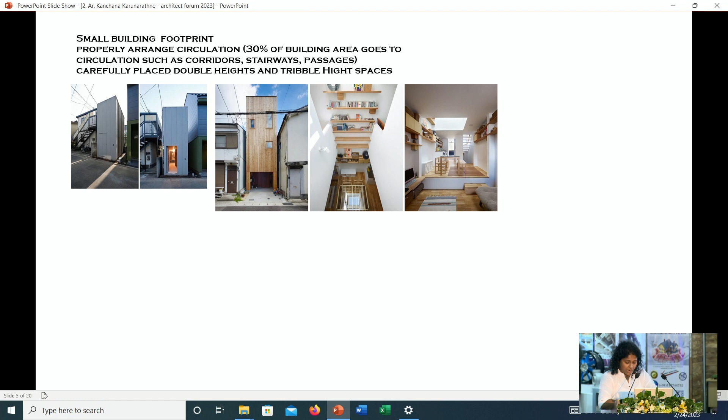These are some images from Japan, which is a highly populated, highly dense area. This is like one perch, less than one perch, and this is how they are building. What they essentially do is gather what is most important when designing - what are the most essential aspects of a house.

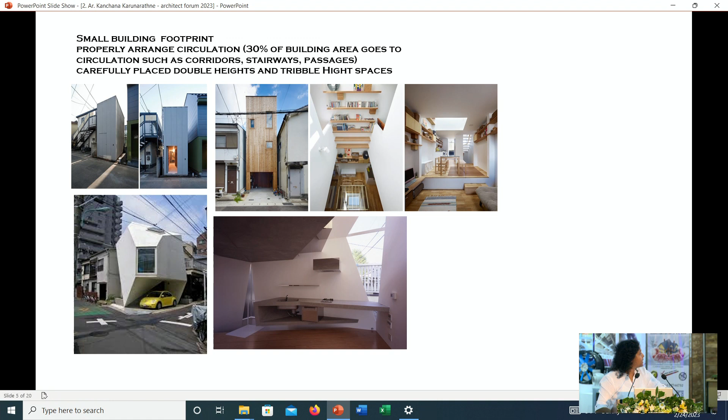This is what one solution looks like. These are some other small projects which I got from Japan. This one is two perches, the house is entirely built on two perches. So what is the total area of one perch? It is 272.25 square feet, which is not a small amount if we utilize that area properly.

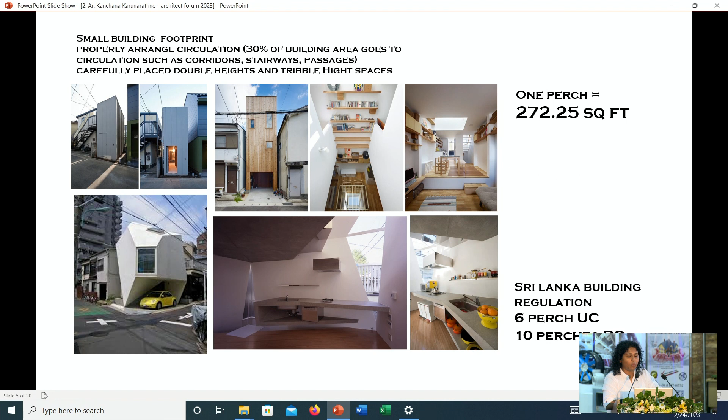But Sri Lanka - now Japan is a developed country, they have about 60% forest covering the country. But in Sri Lanka, the urban council and provincial council have a strict rule: the minimum plot coverage should be more than 6 perches if it is an urban council, and more than 10 perches if it is a provincial council.

These are the regulations when we go to build houses in Sri Lanka, so we can't go beyond this extent. We are restricted by regulation even within this crisis situation. The regulations have not adapted to the current situation in Sri Lanka.

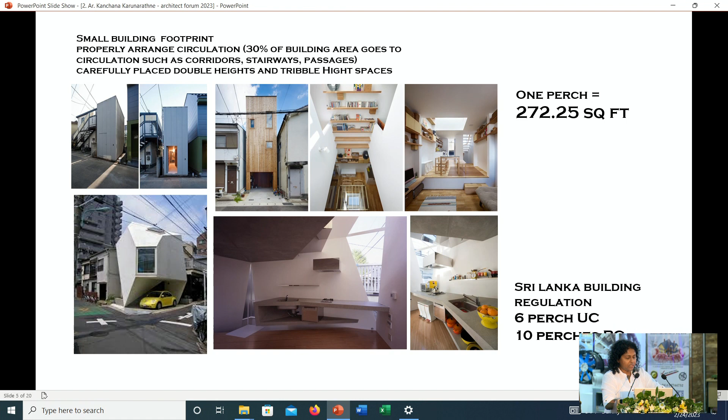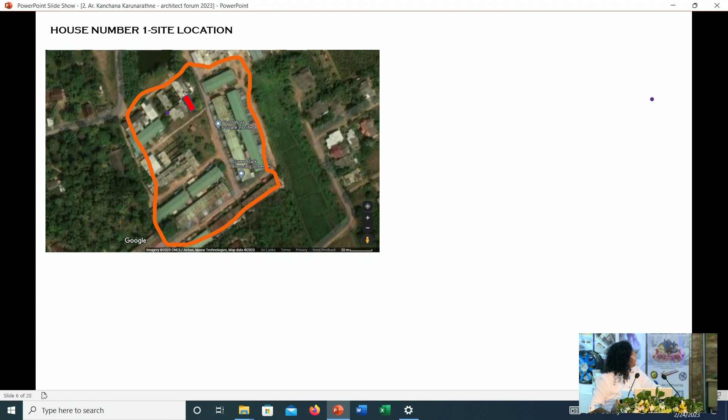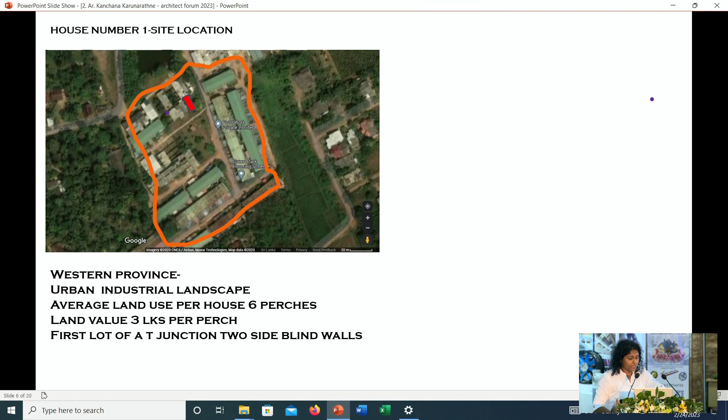My client bought one plot here, but the regulation requires 6 perches to build a house. Now each perch became about 3 lakhs, about 1.8 million rupees. This was the situation when we got into the site.

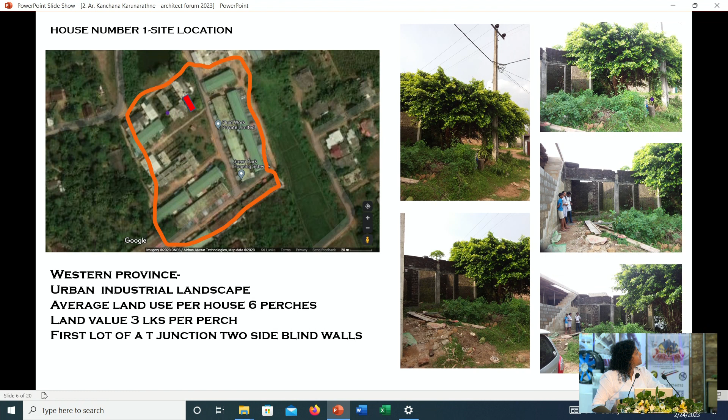These are images of the site. When we took the site survey and did the plans, even though it says 6 perches, the actual area was 5.8 perches - some peripheries had taken part of the land plot as well.

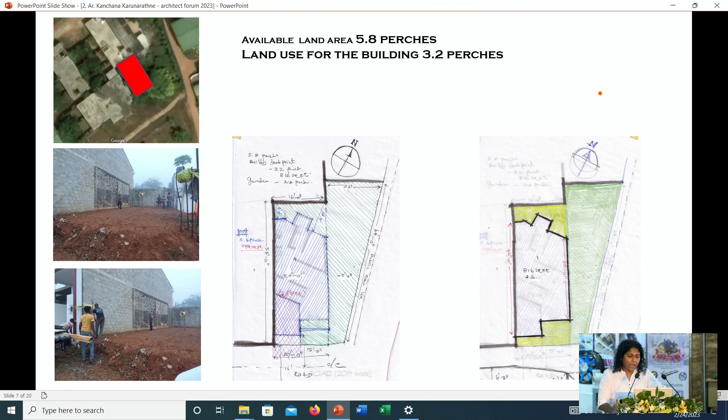From that, we can't use nearly 2 perches because of the rain. There is a purple line marking a stormwater line, and even for a small rain, that entire orange-colored area gets flooded.

So what we did was avoid that flooding area and limit the building to one side of the site, which was about 3.2 perches. So this entire building was built on 3.2 perches of land.

So we have a front width of about 6 meters, and total length of 16 meters.

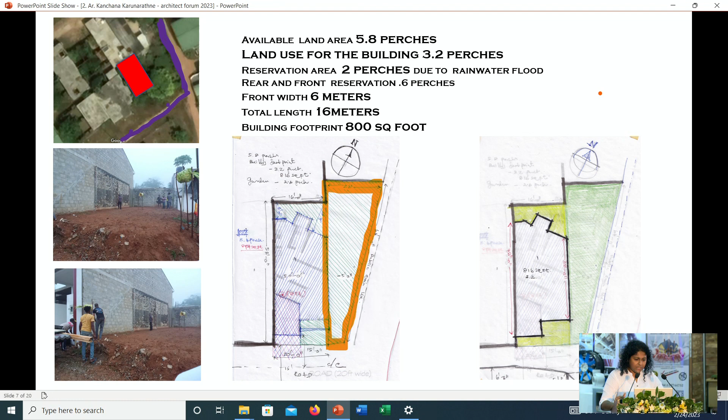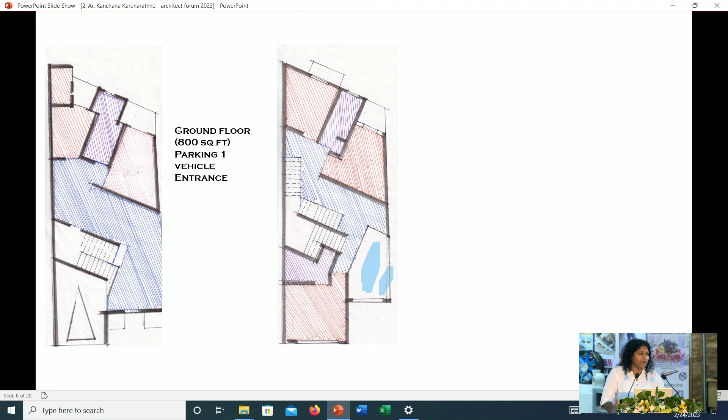Clients have their main requirements. They said we need at least one parking. Okay, fine. Then they need a grand entrance. Okay, I don't know about the grand, but entrance is fine.

Then double height living. So we have 3.2 perches, and they need double height. Then they want to do a small budget house. I said okay, we will do a double height. Everybody's familiar with double height volumes, right?

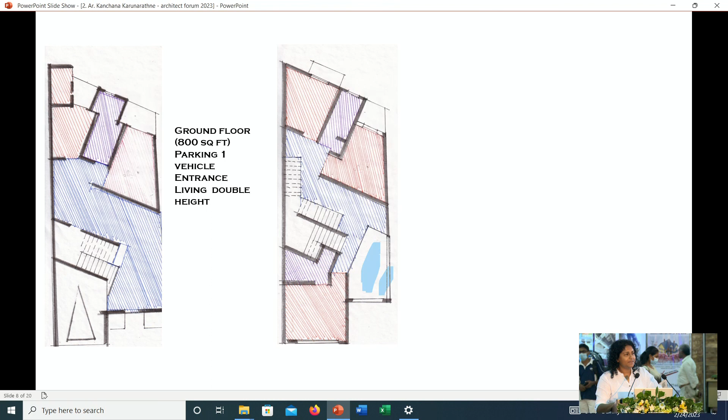Then dining, pantry, and bedroom. Their elderly parents are going to live with them, so they need a bedroom at the ground floor level. Then they also need a wet kitchen, outdoor washroom, a bathroom, utility, and the stairways.

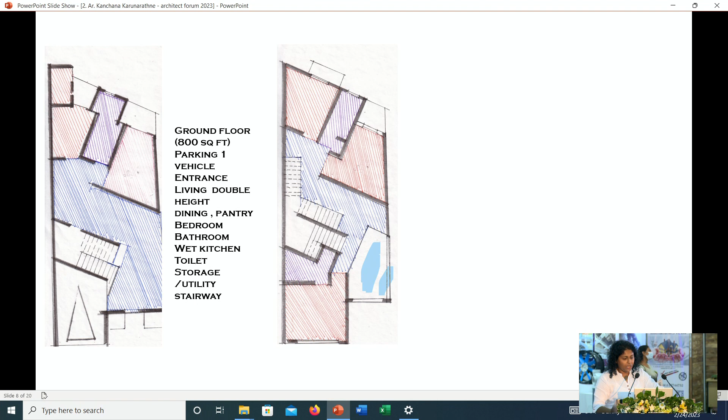On the second floor, they need minimum 3 bedrooms, and they requested each bedroom have an attached bathroom. I said no, we can't do that. We have to compromise when we have a small house, a small plot. We can't have each and everything. So I said one bedroom will have an attached bathroom, and the other kids have to share the bathroom.

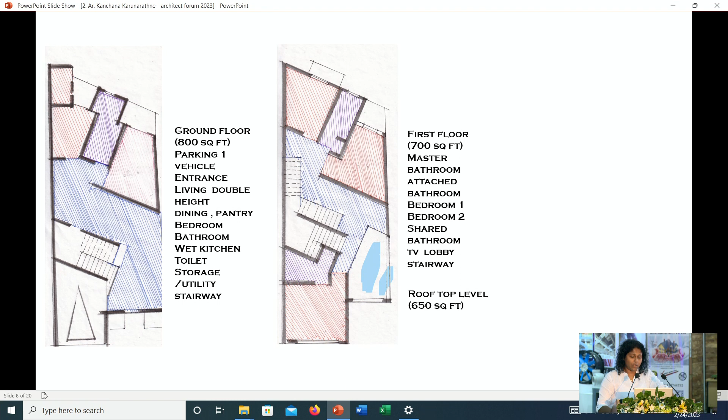Then TV lobby, that's fine. Stairways - the total area comes to about 700 square feet. Then rooftop, again we went with a roof garden and a small pavilion with an outdoor toilet as well.

Now, connecting all these elements, we need to have circulation as well. We need to go through the building without disturbing each other. What I did was make the yellow areas the circulation spaces that became the public areas, like living and dining. That circulation space incorporated with the public areas, so we have that main spine in the house, which is the public area.

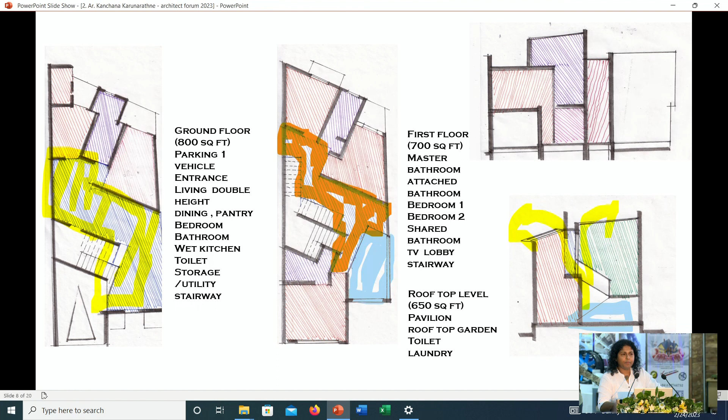This blue patch is the double height volume. We have a small house, but different volumes in the building - double height as they requested, bedrooms in a different volume. That is the triple height staircase volume. Likewise, we have different volumes as well. So that is the main entrance.

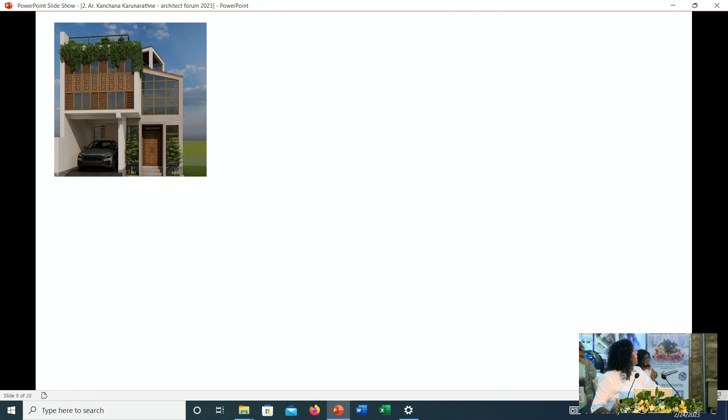This would be the front view of the house - it's a 3.2 perches house. They have the entrance, the main bedroom, one bathroom, and the double height volume. This is the side volume, the side elevation which looks over that area.

Then this is the rear view of the building. All the bedrooms are on that rear area. Then this is the rooftop area.

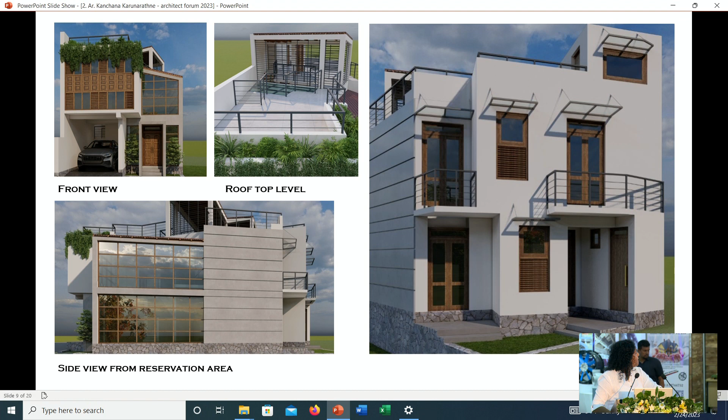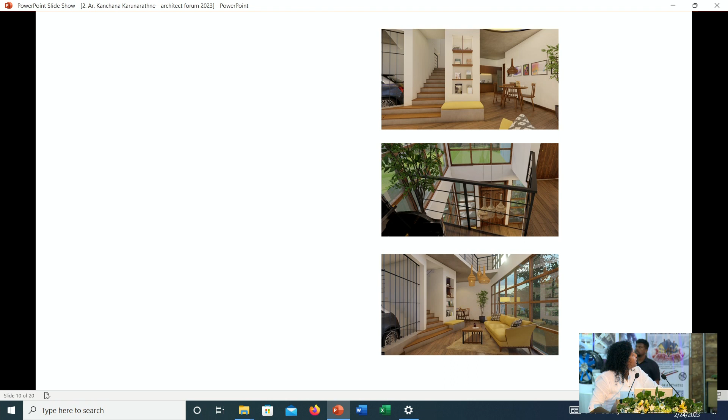So this is the internal arrangement. As I mentioned earlier, we have the main staircase, and this is the double height volume. This is the living area.

This is that double height volume and the living area. Since we have one side getting the sunlight, we have one total glass facade. It gives you more. Actually the living area is about 11 by 17 feet - not a large amount, about 170 square feet.

But with those adjustments, we were able to get some sort of large volume as you enter the house. Mostly, except for one furniture, the other furnitures are built-in furnitures. And the other fact, to create this ambience, we have to have partitioning through the building.

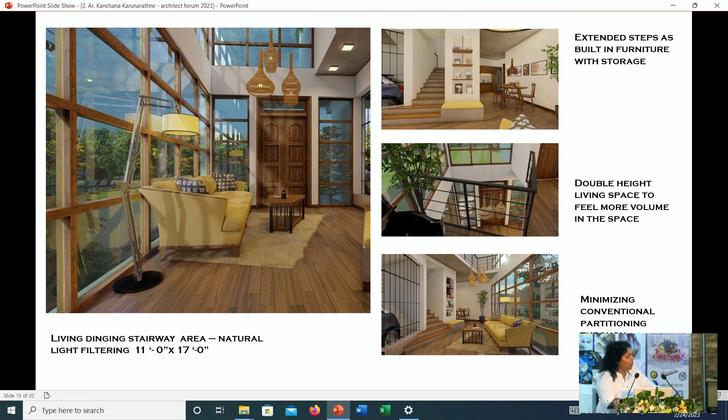We have to zone living, parking and everything. So instead of going conventional, what I did was have a separate steel grill sort of thing between the parking and the living room, instead of a solid partition. But overall, the small space was able to get some sort of vibe.

So this is the upper level. We have the TV lobby as you enter from the staircase well.

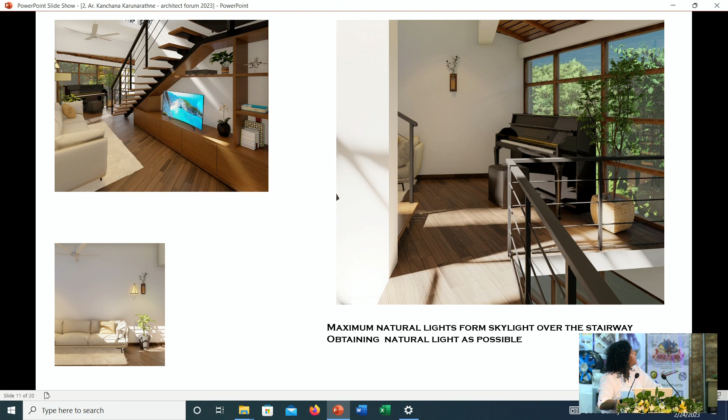These are the bedrooms. Mostly we were relying on inbuilt furniture without going for movable furnitures. For the master bedroom - in each house, when we need storage, storage is a huge issue. Each house asks for storage, so this is the storage also going with the inbuilt furniture.

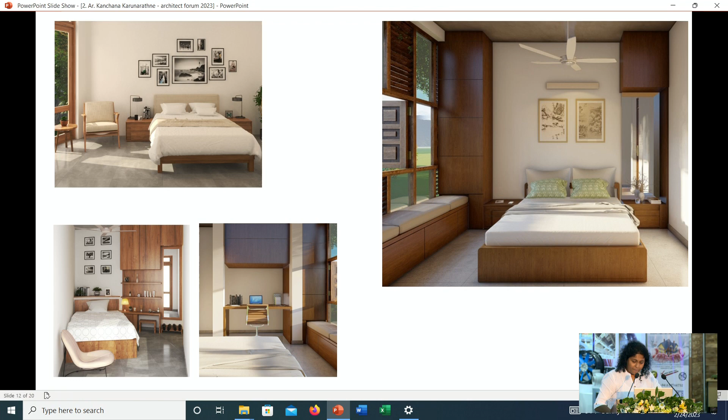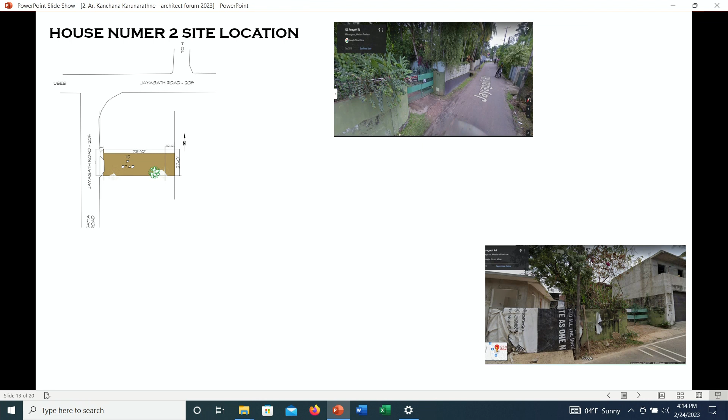Then this is the next house, which is in Colombo. Exactly, we got 7.4 perches. This first image is from 2019 - before, when I visited the site, the Google image shows the road and all. The next image is 2022. Within 2 years, the entire area was built up, only leaving this 7.4 perches of land.

I don't even think these two buildings obtained council approval, but somehow they were built illegally. When we look at the site, it's already crammed on three sides - completely covered. We don't have any breathing space. There's one tree there, the mango tree.

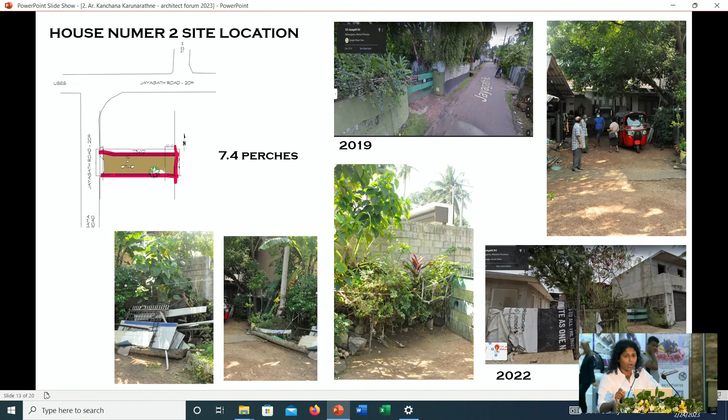I want to keep that tree, I want to save this tree at least - that is very important, the only thing left since other shrubs are gone. And when it comes to regulation, we have the main regulation about rear space.

When it's a two-story building, we need to have a 10-foot reservation. But again, with these clients, they need at least two vehicle parking. The 7.4 perch parking is a main issue - we have a house, we have a parking, you can't park on the roadside. So they requested minimum two vehicle parking.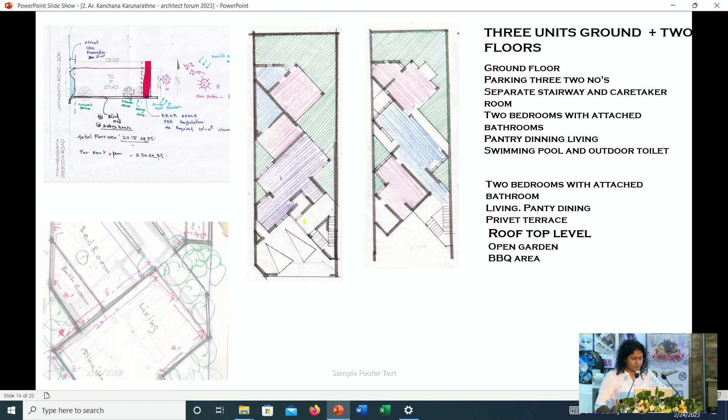So basically we zone into two areas. One, the blue line shows the rear space, we leave it like that. The front is the parking lot.

Since we don't have any garden spaces or other breathing space in the site, what we did was giving garden spaces within the site. The building is located within the garden space. It's like a house more inside of the garden. It's not a house where you look outside from the house, you are already living in the garden. It's that sort of concept.

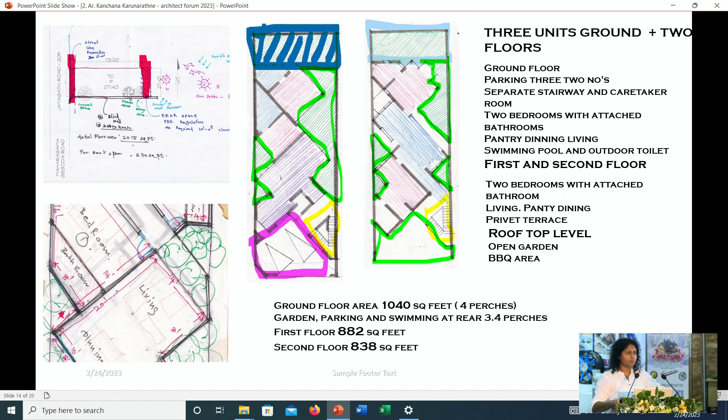So all the green patches show garden spaces around the house. Then they need a separate staircase. The client wants to rent out the 2 stories above. The ground floor is going to be occupied by the clients. The other 2 floors are going to be rented out for their financial reason. Then the entrance is from here.

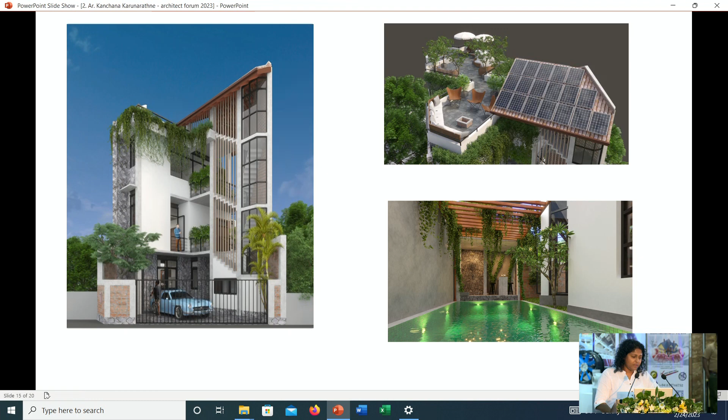Since we designed this after COVID and the roof garden was there as our rear space, since we have a significant rear area, we gave this as a pool area. This is the building from the roadside. It's a 3-story building. This is how it looks.

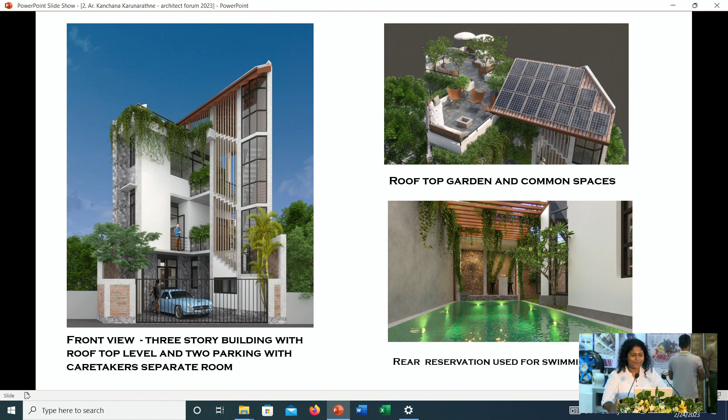This is some images of the 3 different levels, the living, dining area. We have 3 different floors, each with a different character in the tree. Each floor has a different feel.

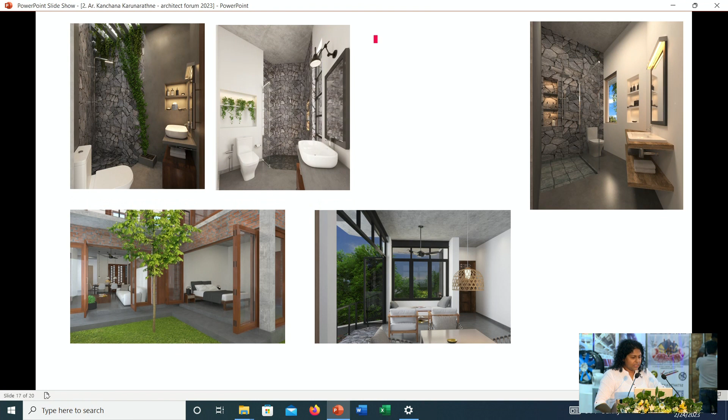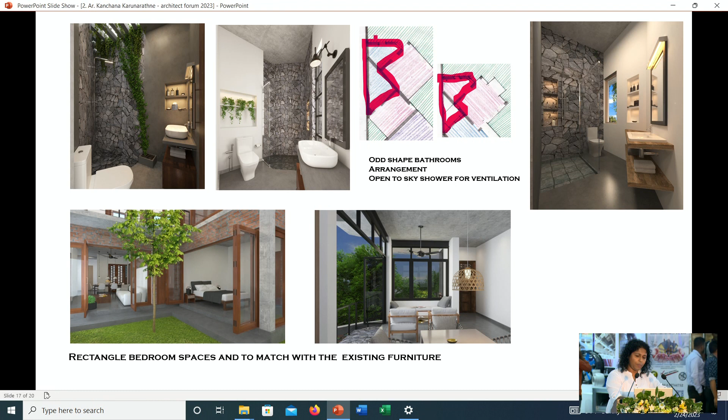Since we have that odd shape of the building, bathrooms became very odd or triangular, irrelevant spaces. So we had to manage these bathrooms into that area as well.

So with my experience, I would like to mention 3 points when we design small spaces. One thing is natural daylight. We can't ignore the natural daylight. Just try to get whatever available material. We don't rely on artificial lighting.

The other thing is creative storage. What I mentioned is what we normally do is have a store area, utility room, and put all the dumps into that area. The house has one room that could be a bedroom, but later turns into a storage space. Don't go for that. Try to be a little bit creative.